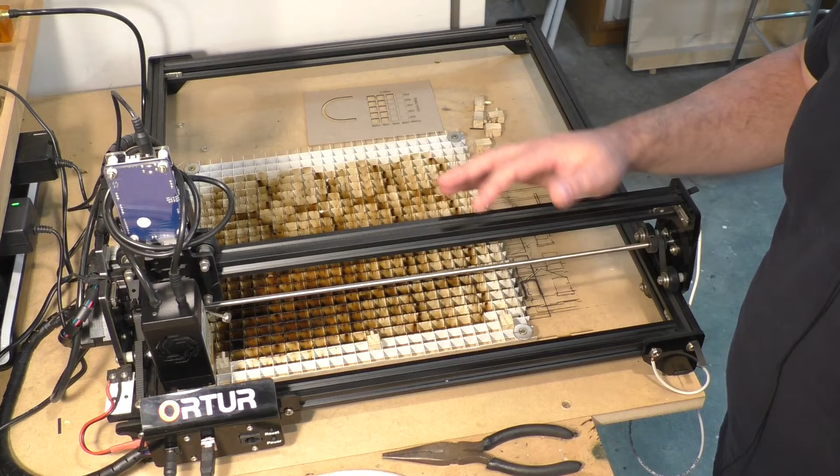This is where all the laser cutting happens, and this particular machine is an Ortur Master Laser 2, so it's not the Pro version, which has a much more extensive frame, and even has things like a big giant safety switch that you can slam if things go astray. So I would class this very much as a hobby laser cutter. This is a diode laser, not a CO2. The CO2 lasers are far more extensive and they can pretty much cut through all sorts of stuff.

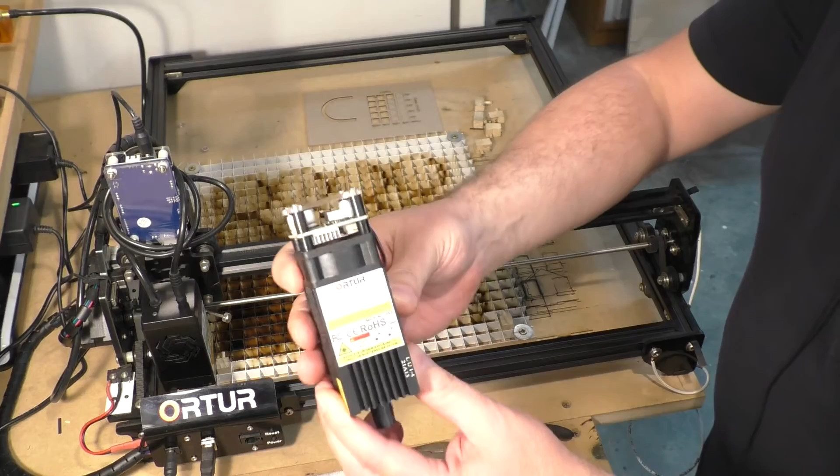When I first bought this unit, a couple of years ago, it did come with its original laser module, which is this one here. Although in all the advertising it claimed this laser cutter is 25 watts, that doesn't actually relate to the actual power of the laser itself. The 25 watts I think just relates to its power consumption as opposed to the actual output. This laser module is actually 5 watts, so it's really quite a low watt laser, and it did work quite well, but particularly with MDF you had to do quite a few passes. On 5mm MDF it would take 4 or 5 passes, on 3 or 2mm MDF it would take up to 3 passes to cut through, and that's at 100% power.

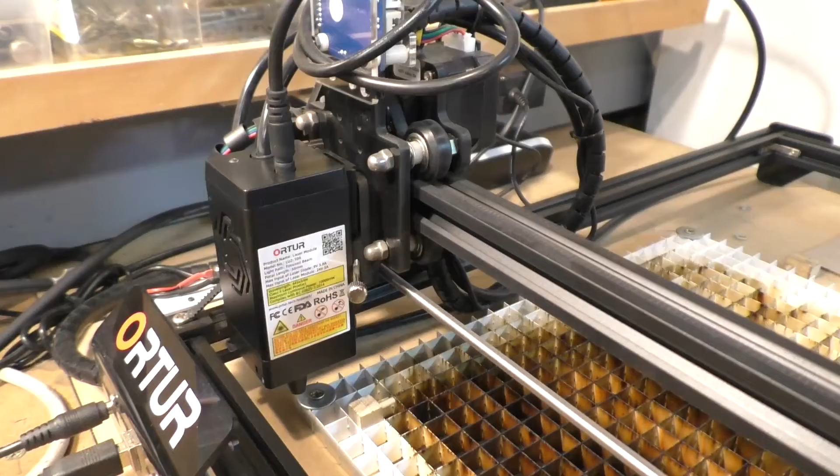Just recently this year I upgraded the module to a 10 watt laser. The 10 watt laser is essentially two 5 watt lasers that are then channeled through a series of mirrors into a single beam, which gives the 10 watt laser beam. This module has made a huge difference. For example, I can cut through 2 to 3mm MDF in a single pass, and things like heavier card, that's also a single pass, but also at a much higher speed. The difference between a 5 watt laser and a 10 watt laser is actually quite significant, and it certainly made a big difference.

This laser also comes with a built-in air assist connection to it. The air assist I've got hooked up to this pump here, which I think is possibly designed for fish tanks, but it provides the air assist for in here.

What I've got in the cutting bed here is actually just a grill from an old air conditioning vent, which I picked up secondhand from somewhere. You can actually get professional grids, I think some of them are called honeycomb grids, and you can get ones that utilize the entire space here. I haven't really needed all this extra space, so I guess one thing to mention is this laser cutter can cut material up to 400 by 400 millimeters. So this is just an aluminium grid which I've anchored down with some screws and washers, and that's on some solid MDF. It's not ideal, obviously, and at some point I will upgrade this and put in a professional cutting bed, and also put in something underneath that's a little more resistant to the actual laser burning through. I think some people actually use ceramics of some sort, which seems to be the best solution for resisting laser.

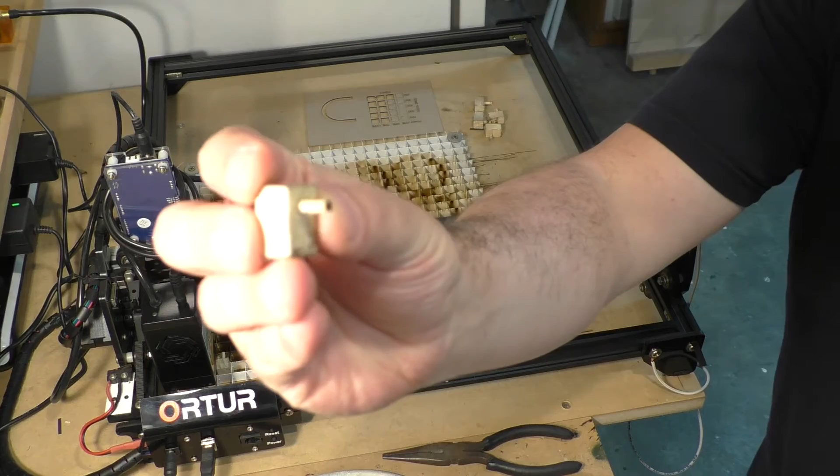It'll have a warp in it, it'll be slightly bowed, so what I actually did is made up some little wee pegs, which is just a piece of square wooden dowel with a kebab stick poked into the end of it. They fit really nicely into the grids in here, and basically I can clamp down the material around the edges. So when I put the material in, I work out which way it's bowing the most, and if the bow is going downwards, I can put it in there, clamp it around the edges, and that keeps it nice and flat.

So we'll go ahead and do a little bit of cutting out. We've got some brick wall texture that's already been pre-glued to some card, and we're going to cut out some brick walls from that texture. We'll go through the process of how this is all set up and then cut out. So this is our brick texture here, and it's been printed out.

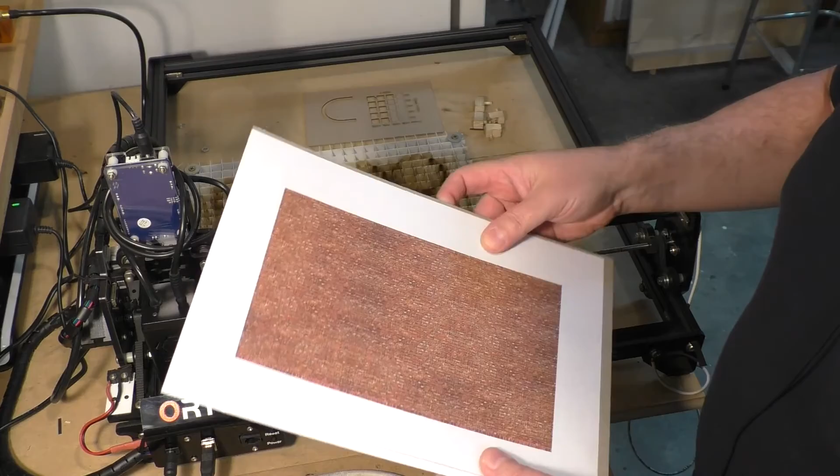It's already been pre-sprayed with a matte spray. I have spray glued it to some 1mm card, so this is actually going to be used for some brick wall around the coal merchant's yard, which of course is in a separate video.

I'm using this method where I'm going to laser cut post applying the brickwork rather than the other way around, because I have tried it before and it does work. But the main thing is to make sure the horizontal movement of the laser is lined up with the horizontal grid of the brickwork, because if it's on a slight angle in any way, you're going to end up with brickwork that's all wonky.

So in this stage here, just along the bottom, I've drawn a pencil line which is parallel to the actual brickwork along here. I'm going to use this line to line up the laser to make sure it's running in the right direction. One of the things I haven't done is anchor this frame down, so as you can see I can actually move this frame around a little bit.

So what I do is make a registration at one end with the laser and then adjust it ever so slightly until I've got the same registration at the other end here, and then I know that this gantry running across here is exactly in line with the brickwork.

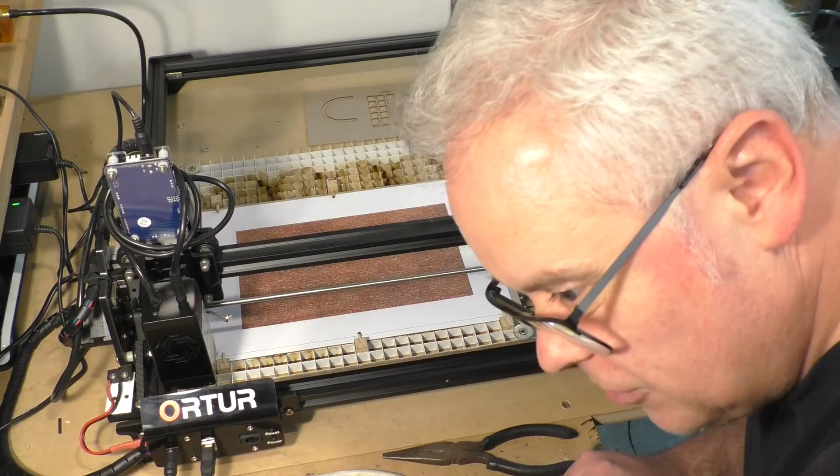Right, so I'm going to switch everything on now, and unfortunately there's the extractor fan, there's a fan in here, there's the air assist pump, and other fans, so it does make a bit of noise, but there's not a lot I can do about that, so hopefully you'll still be able to pick up my commentary.

So I've got the laser cutter hooked up via USB, connected to a computer behind the camera. It's actually an iMac, so it operates fine off a Mac computer, and I'm using Lightburn for all my cutting. I find Lightburn is a really good bit of software, it seems to just work without fail.

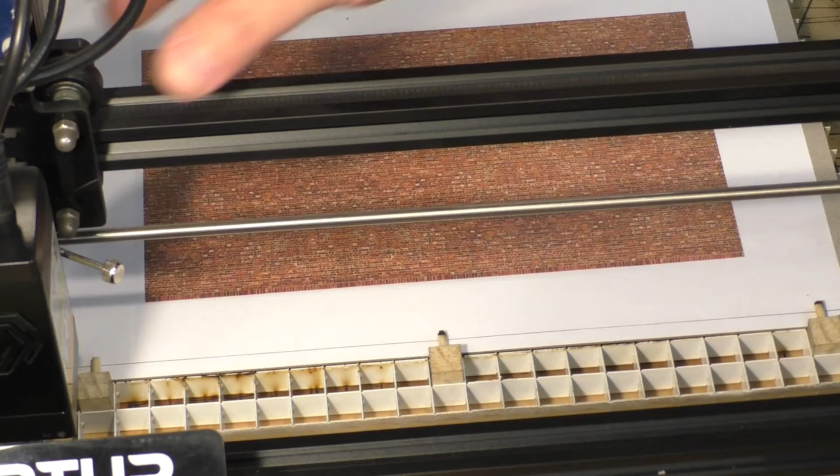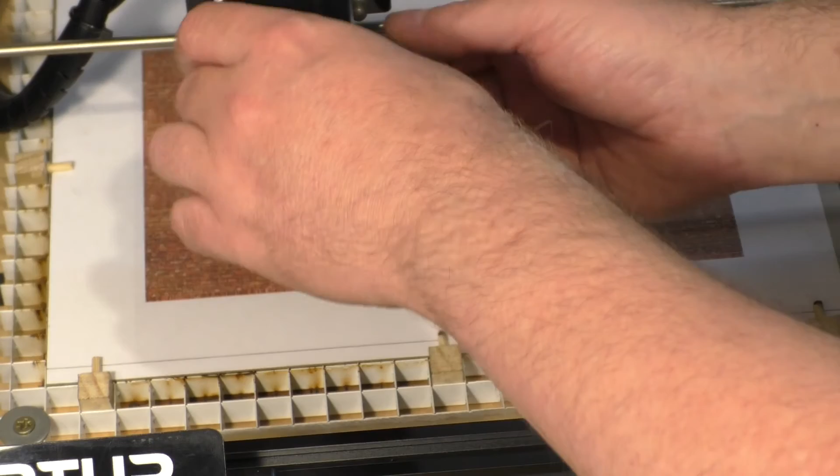So depending on what material you're using, the first thing you need to do is get the height of the laser worked out. The great thing about this new upgraded laser module I bought is it comes with a little leg that you poke down. You just unscrew the laser module sliding bracket, slide it up and down until the leg is resting on your material, and then simply tighten it up. That's all you have to do, and that's now set at the correct height above the material.

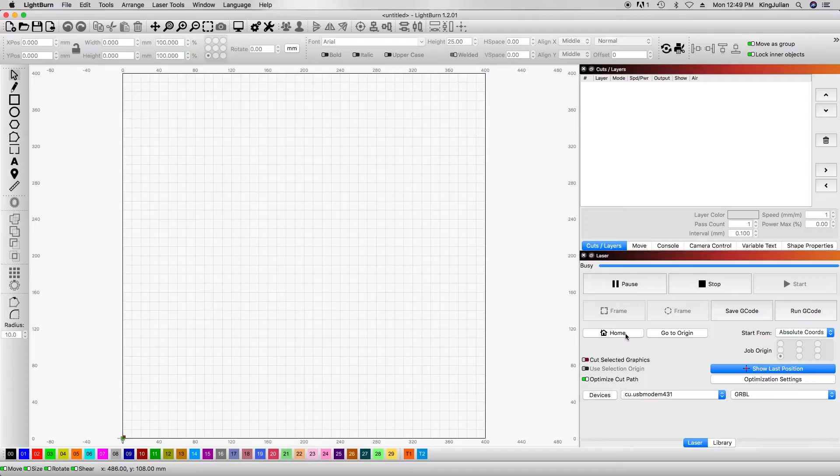So we're in LightBurn now, and I'm not really going to make this a huge video about how LightBurn works, but some of the basic things include home and origin buttons. So the first thing we're going to do is click the home button, and that's going to send the laser back to its home position. What I'm going to do is import the file that I want to use.

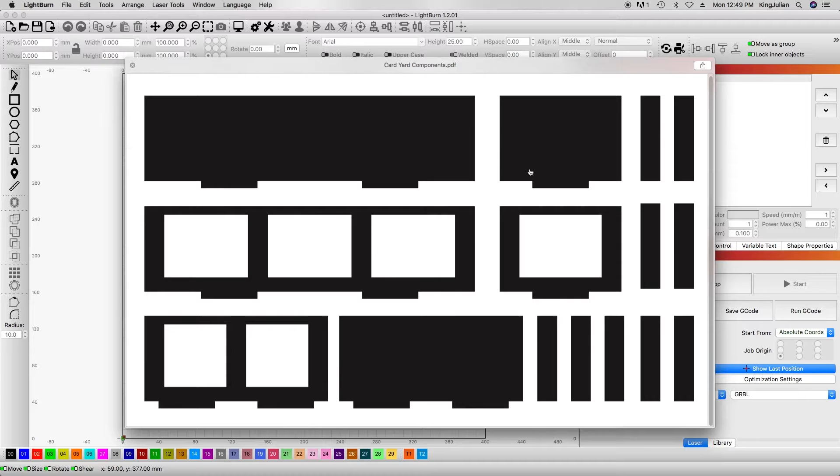It's this one here - these are components of the brick wall that need to be cut out. So we'll open that, and it brings it into the cutting area. This grid represents the maximum cutting area of this particular laser.

The first thing I've got to do is get that laser registered in the correct orientation with the actual brickwork material. On this tab here, the move tab, we've got various position tools for moving the laser, and where we can set the origin and those types of things.

The first thing I want to do is get the laser to that pencil line that I drew. So we're going to shift the laser head, moving it in 5mm increments, and in these settings here I can change these to any increment you want.

I'm just getting it there visually at the moment, and down here is the button called fire, which sends a test fire to the actual laser head. It's only 0.25% power, so it's not going to burn through anything - it's just purely indicating, and as you can see we now have this blue laser mark on the material.

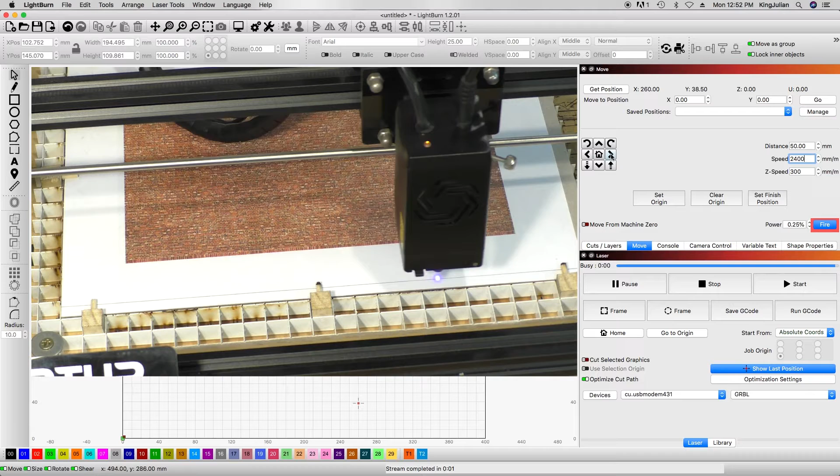So now what we're going to do is bump this right up to, we'll go up to 50mm increments, and we're now going to travel horizontally to the other end, and probably there will do.

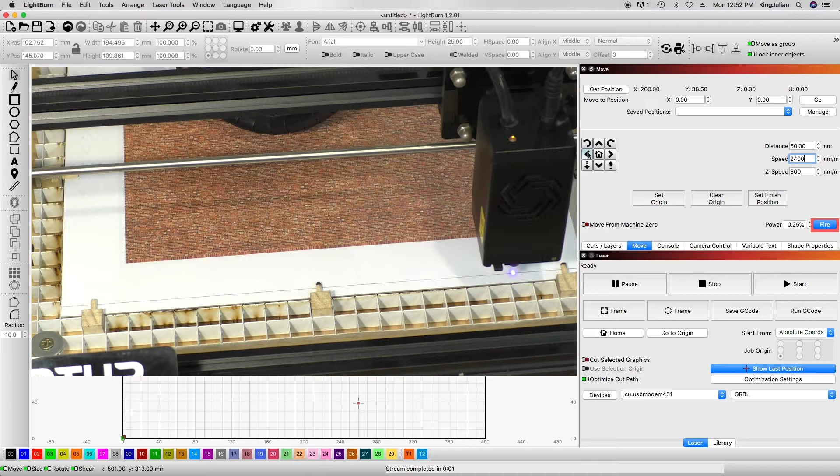It's possibly just slightly out, so what I actually do is just with a smidgen adjust the actual entire laser frame. I've just moved that laser frame by the smallest nudge, and then if we go back to our first position and just check again down here, I'm happy with that. So now the frame is lined up with the material.

So the next step now is we need to get the laser actually into the brickwork area. We'll drop our increments down to, say - I think we'll go back to 5, and then we can use the up arrow keys there, and that will increase the distance by increments of 5.

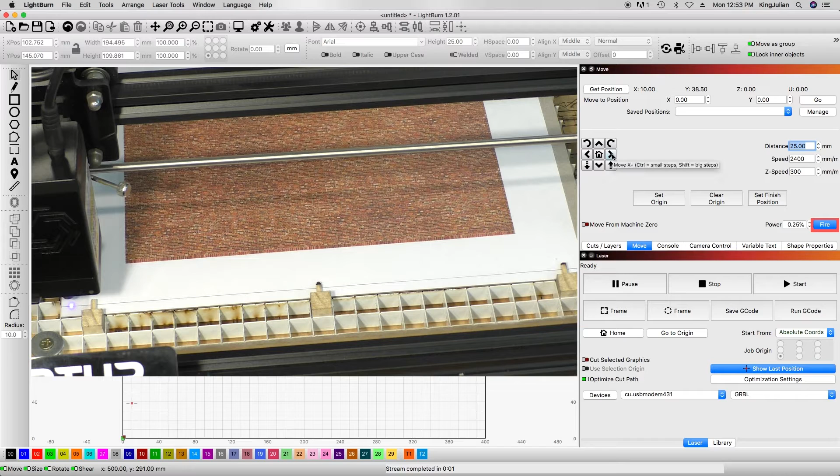So we're now moving the laser up. Might go back down to 5. And we're now inside the actual material that we want to cut, which is the brick area, and we can now set the origin - that origin is now set to that particular part, and we can switch off the fire button. So now the actual laser machine is set up and ready to go.

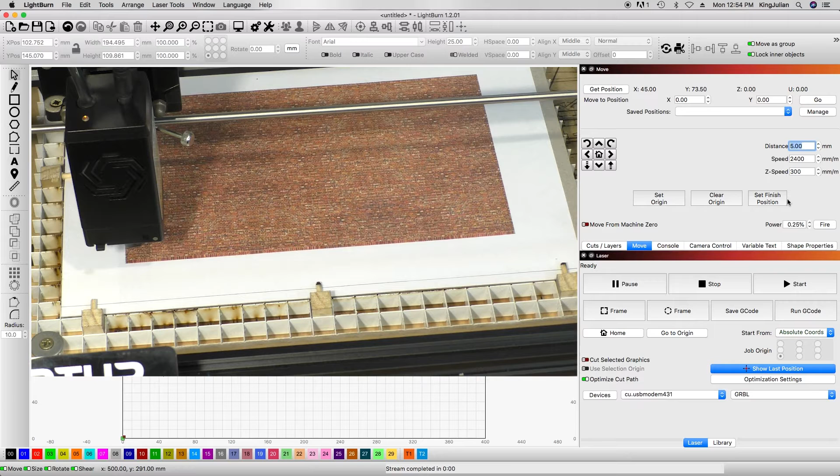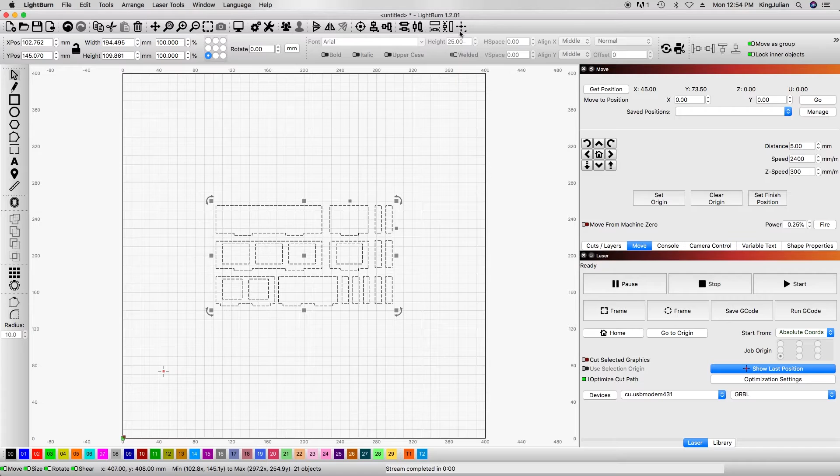Heading back to our LightBurn software, we can now actually see where the actual laser is in relation to the laser cutting machine. So the first thing we want to do is gather all the materials that need to be cut, and I move this to the laser position. That sends everything down to the point on the laser, and if you can imagine, we've got brickwork running around here.

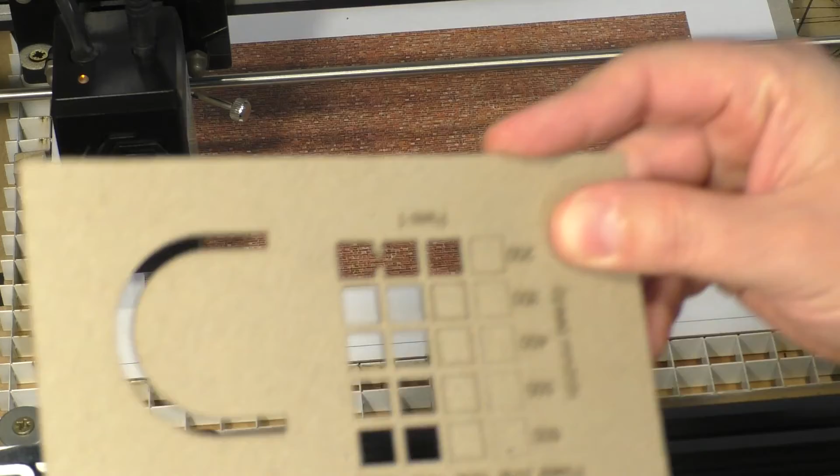So now we can zoom in on this material, and the next step is to actually set the requirements for this material. Now this is 1mm card, it's got a thin layer of paper across the top, and I do have some presets for various things - in here we've got an example or test sheet, and this is 1mm card. You can download these files off the internet and put them through your laser cutter to work out what strength or power you need to set the laser to, and also what speed you need to set the laser to.

I have a feeling in the past I've used 100% at 450 millimeters per minute. They do say that you shouldn't really always have your laser set on 100% because it does reduce the actual life of the laser, but I don't think I use this laser so much that I'm going to wear the laser head out prematurely.

So the first thing I'm going to do is set the power and the speed. We've already got it on 100% power, so we're going to change the speed to 450, which is going to crank it up a little bit further.

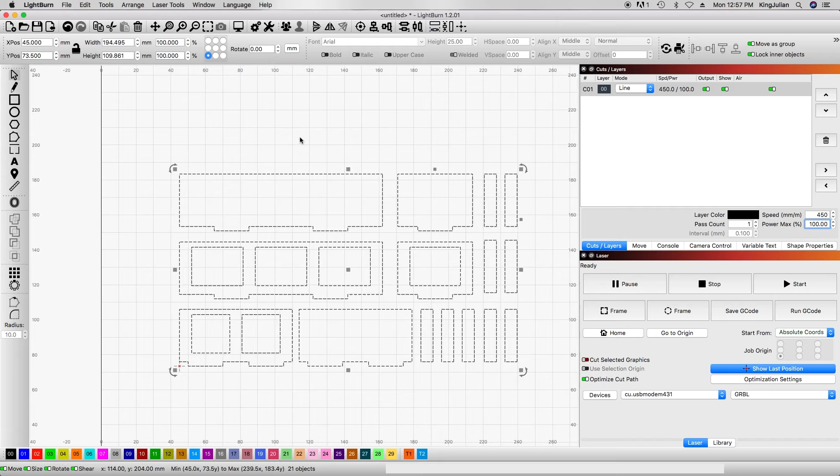Now what I tend to do, particularly with this file here, is we've actually got some inside shapes as well, so I prefer to have the laser cut the inside shapes first before the outside shape is cut, because what tends to happen sometimes is if you cut the outside shape first, it may shift or move, or the air assist may even puff up and blow the piece of card out of its position.

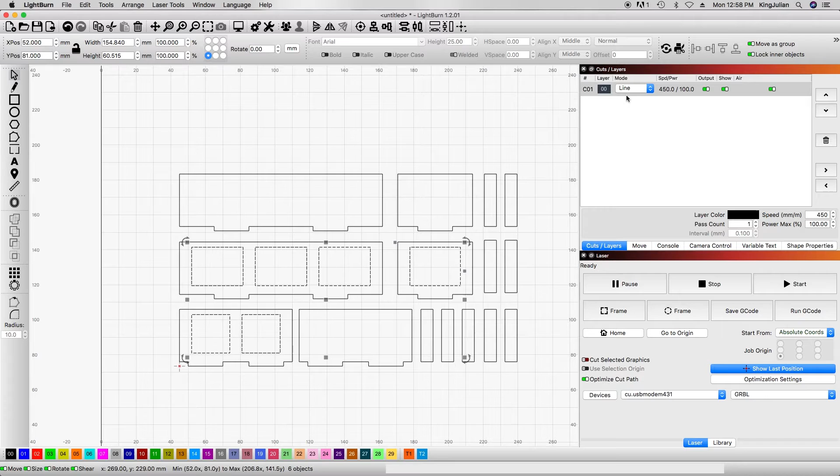And so I cut the inside shapes first. What I need to do here is select those internal shapes which are going to be cut out and basically give them a new layer. Our laser has all the material currently set on C01, so I'm going to give this internal layer an 01 setting, so this layer is 01 and the outside shapes are 00. Then it's just a case of moving the 01 shapes, the internal shapes, to first in the queue, so it'll cut these 01 shapes first and then finish off with the 00.

But we notice here that now that we've put these on the 01, we've dropped back our speed, so I just need to adjust that back up to 450, because they're going to have the same equivalent power and speed settings. So that's pretty much it for setting up to cut this set of card.

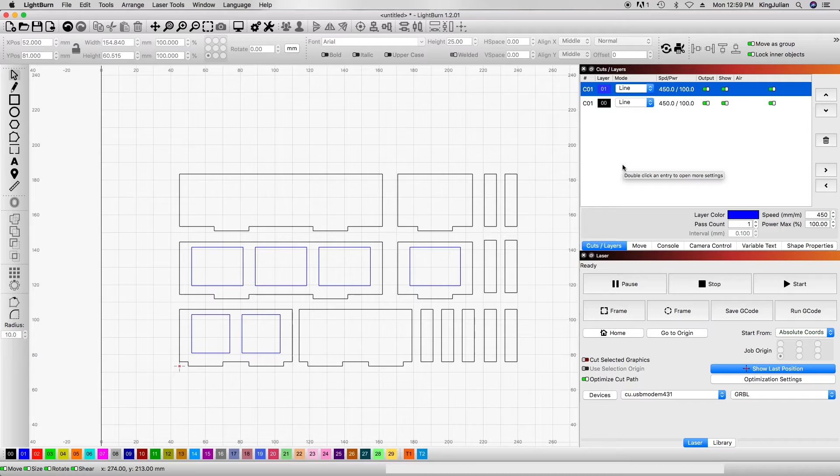And because I don't have a professional enclosure, of course you need to wear these, because the laser can be quite damaging for your eyes if you stare at it.

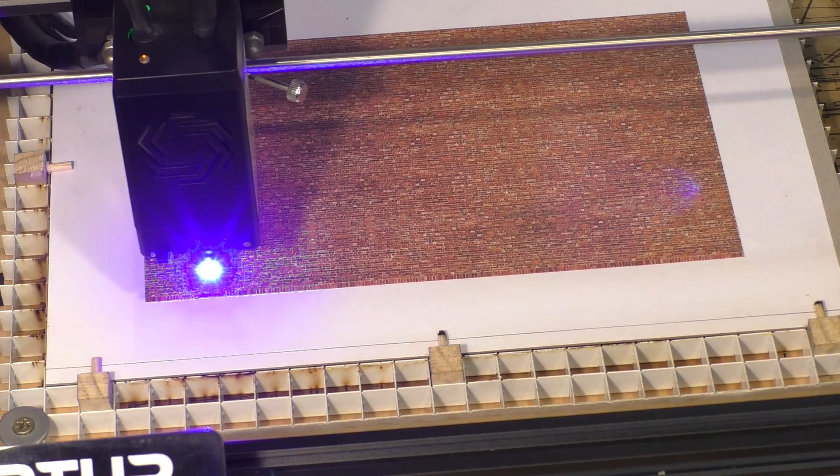So as you can see, it is cutting the internal shapes first, and there is a set of 6 of those that it's going to cut. Hopefully with a bit of luck I've got the power settings correct, and also that the alignment of this frame is lined up perfectly with the brickwork as well. So this of course is the 1mm card.

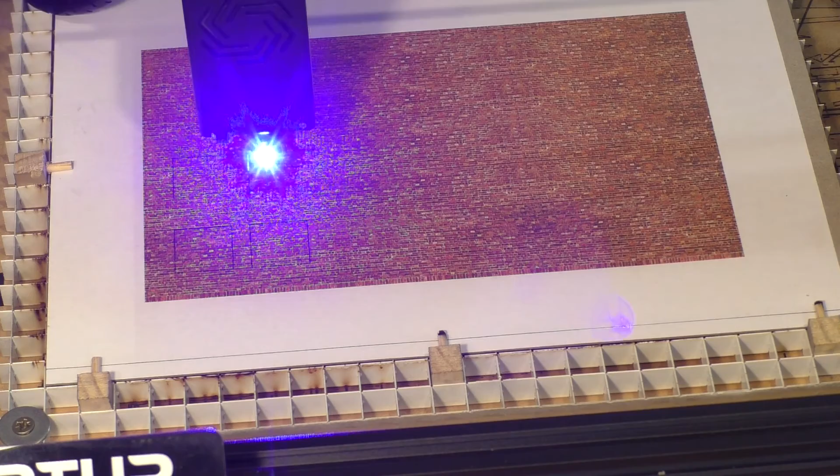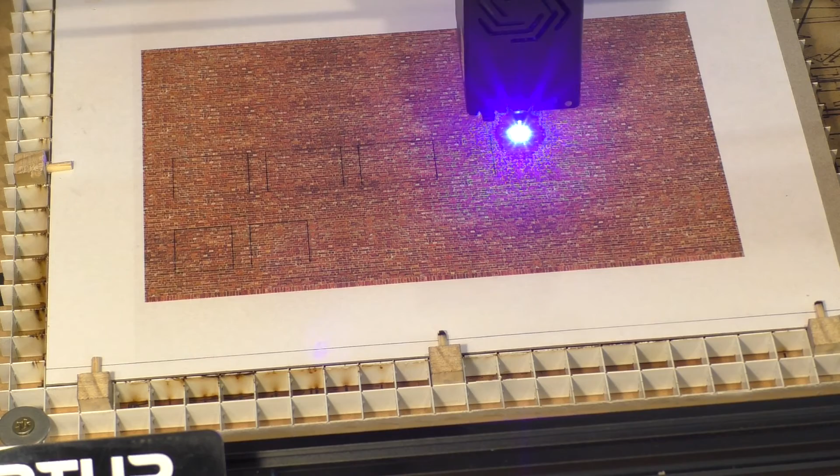I often use the 2mm card. The 2mm card is mainly for base structures. So for example, the coal merchant sort of workshop and boiler workshop area building that I'm working on at the moment, the base structure is 2mm card, and for that I just reduce the speed of the laser, set that on about 300 millimeters per minute at 100%, and it will cut through it with one pass.

So to finish cutting the internal shapes, and now it's cutting the external shapes. From what I can see, without staring too closely, it does seem to be lined up with the brickwork.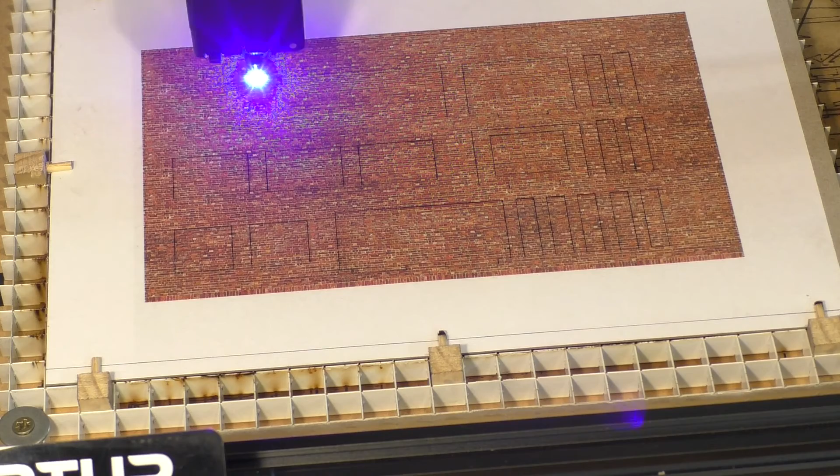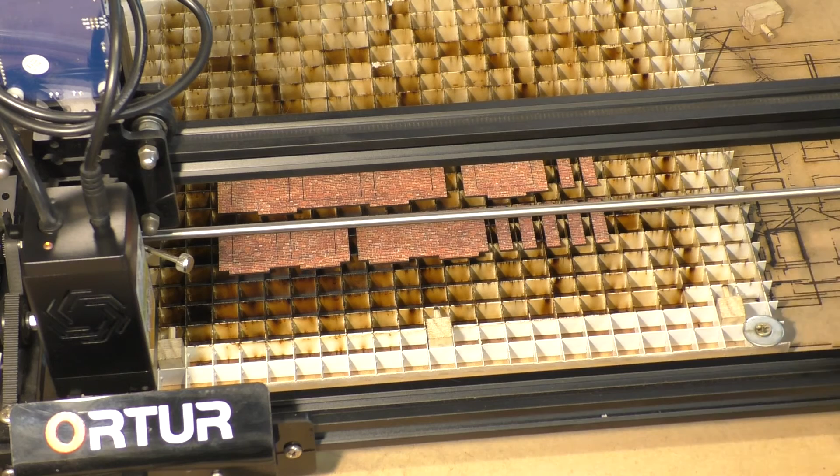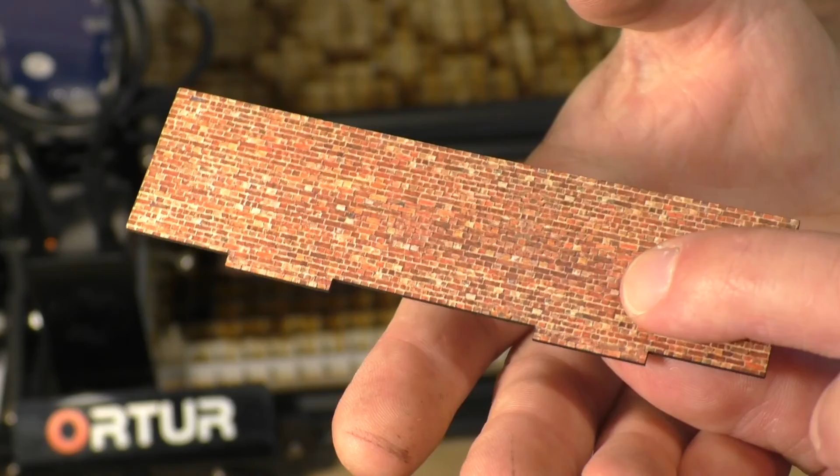So that's all cut out now, and it's just a case of getting this off the cutting grid. The theory is I should be able to lift this up, and that gets rid of the excess, and then we actually have our cut out sections of brick wall.

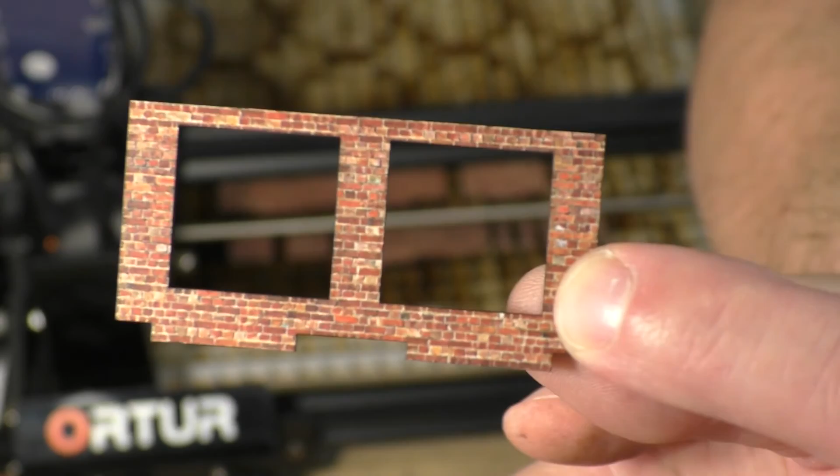So one of the only downsides, I think it probably relates more to a diode laser, particularly with card, is it does leave a sooty edge on the actual card itself. So that's our components there, but what I have to do is brush out all the sooty bits around here just to tidy it up before I work with it any longer, because it can get quite messy.

So there we have it. I certainly hope this video has been very helpful to those who are interested in the laser cutter that I use and roughly how I go about producing some of the kit bash components that I use on the station road layout.

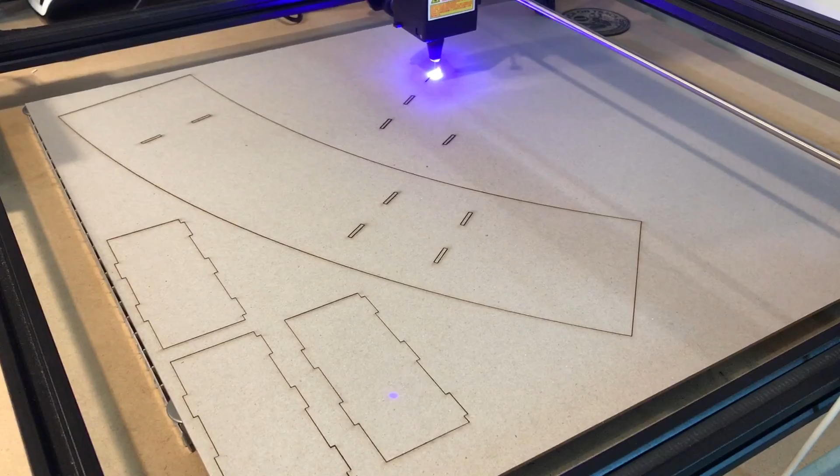Now, if I could say there was one purchase within the last few years that relates to the production of models, I would have to say the laser cutter is probably one of the best and most worthy purchases I've ever made. It has changed everything about how to produce scratch built card kits, and also how to modify and improve on the Scalescenes kits or any other downloadable kits that you can get off the internet. It has been an absolute godsend. It has just eliminated all the hard yards of having to hand cut material, and also be able to cut material that is so accurate and a hell of a lot more tidy and precise than if it was hand cut.